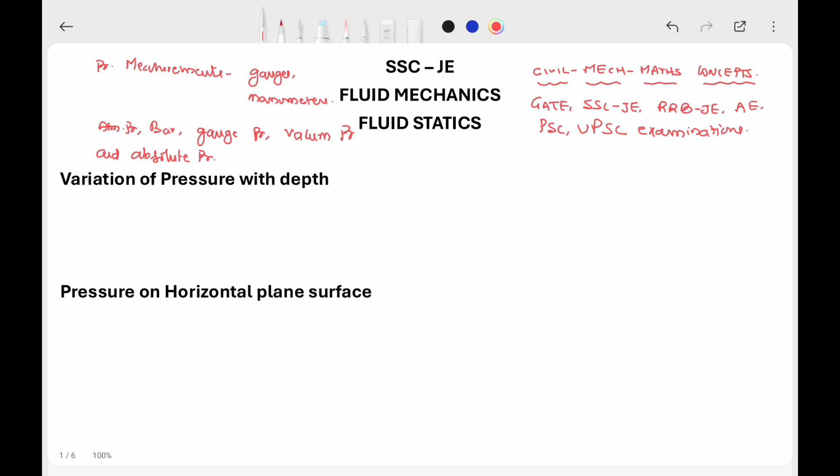As I explained in the previous lectures, a fluid can be either a gas or a liquid. Either a gas or a liquid.

In this lecture, I will be discussing fluid statics. A fluid can be static, without moving - fluid is not moving, static means not moving. And a fluid can be dynamic also - dynamic means it is moving. And there is a transient movement by the fluid. Static means there is no movement, the fluid is stationary.

Before taking up the dynamics of fluids, in this lecture and for some more subsequent lectures, I will be discussing the statics of the fluid.

The pressure definitions you already know, and the statics of fluids we will understand now. If the fluid is a liquid, then liquid statics can be called hydrostatic. And if it is a gas, it's gas statics or aerostatics. If a fluid in the form of liquid is static, not dynamic, and not moving anywhere, then it comes under the hydrostatic classification. And if it is a gas, then it comes under the aerostatic classification.

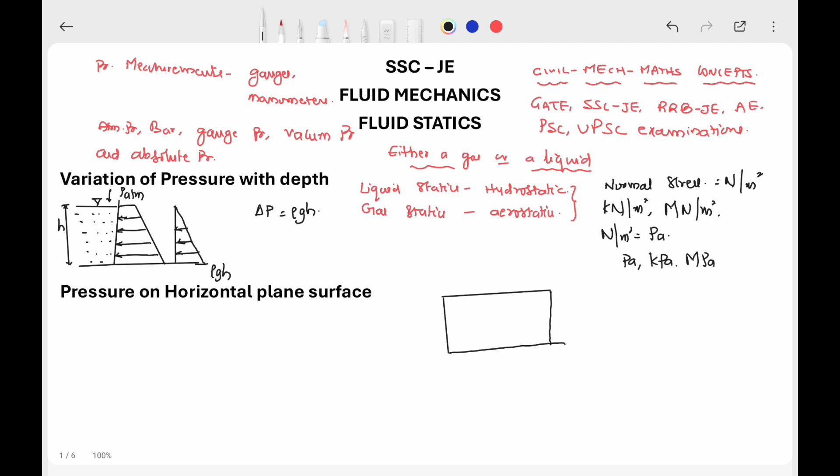Let us take hydrostatic pressure on a particular surface as the example. Let us take a plane surface. Plane surface means it has no curve - a horizontal plane surface. Undulations are not there on the surface. The surface is plane because of the absence of undulations. Let us say it is the XY plane, and this is the plate. A plate is there on the XY plane. This plate is called a horizontal plane surface.

And if I take it in three-dimensional view, it will be like this. Here fluid is there, the fluid surface. Let us draw an isometric view.

This is the plane surface. Let's say this is X, this is Y, and this is Z axis. And this is the plane - I will draw it with red so you can understand well. This is the plane surface.

For example, instead of a horizontal surface, let's say I kept the plate vertically. For example, I'll show it geometrically like this. Please try to understand, it's very, very important - these concepts, how a vertical plane looks like.

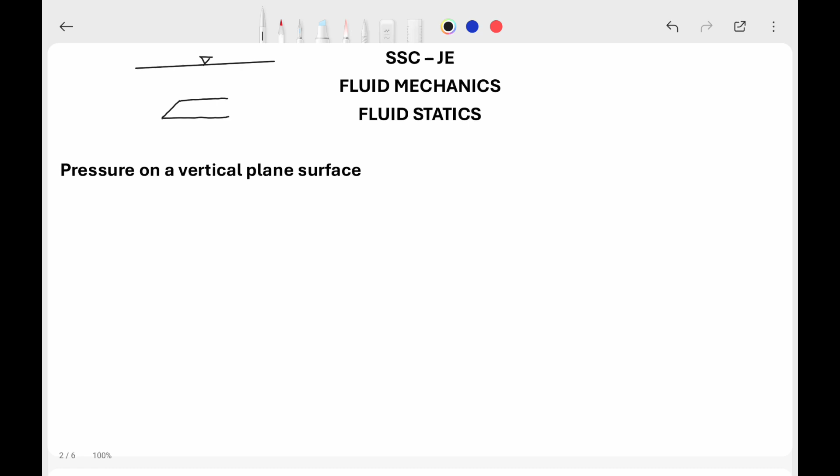The horizontal plane is the free surface, and in the z axis, a plate in isometric view like this, and this is the centroid. From the centroid it is H. Then this is the force, the normal force.

The normal force or pressure force is equal to rho g AH. This is for the horizontal case.

If I have taken a rectangular plate - don't worry, it doesn't have to be rectangular, you can take any arbitrary shape. Only for ease of understanding I have made it like this. Now, the plate is there, this is the free surface, here it is P atmosphere - this is the fluid free surface.

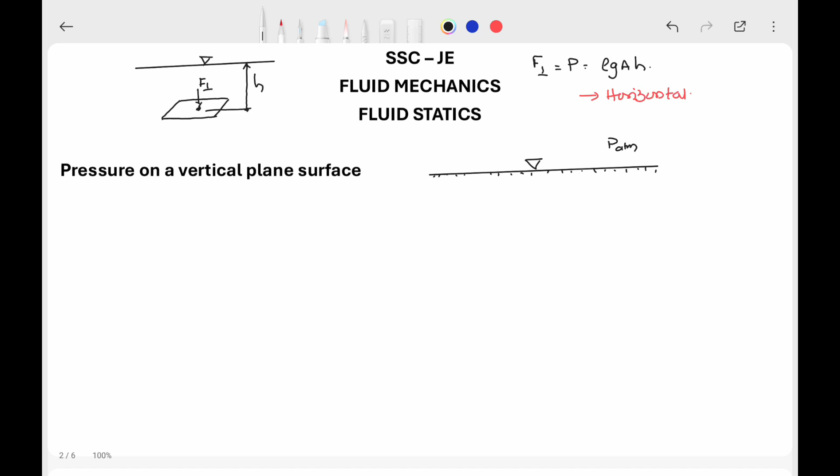Then if the plate is kept like this, it's not horizontal, it's kept vertically. When something is kept vertically, what happens? Pressure will be acting perpendicular to this surface.

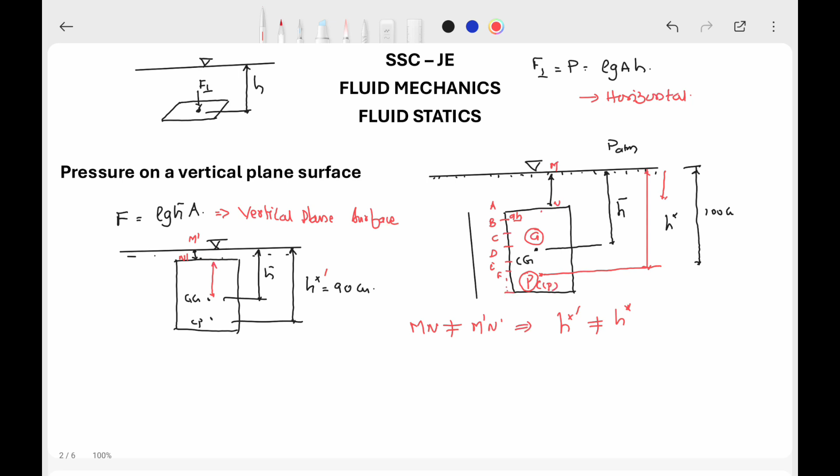This is, let us say, M, N. Here it is M dash, N dash. MN is not equal to M dash N dash, which implies H star dash is not equal to H star. Even though the center of gravity is lying at the same point for the plane surface, the heights H bar and H star dash are both different. Center of pressure differs from the height. Please try to understand this concept.

Then, how to find out the center of pressure? This is found out with the help of moments of the resultant forces to be calculated. When you calculate the moment of the resultant forces, we can get the center of pressure.

Center of pressure can be calculated, for example, about this point - I am taking a moment. That means F, about this surface, about this point the force is acting, and about this surface I am taking a moment. Please see, this is the surface, this is the force acting, and it is acting from a height of h star. What is the moment? Force into distance is moment, as I have already explained previously.

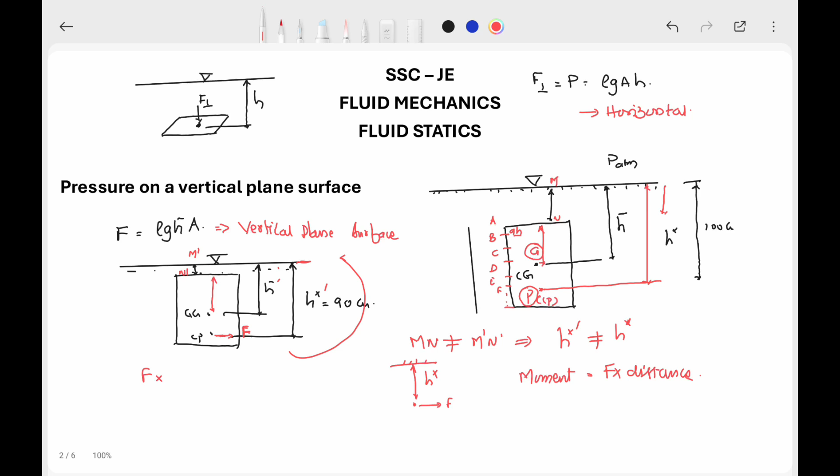Please remember this when you take the moments about the free surface. When moments are taken about the free surface, please remember this formula.

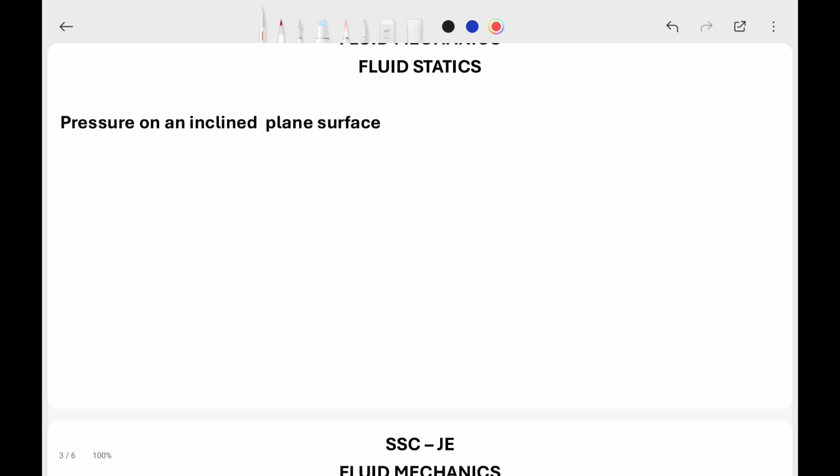There is one parallel axis theorem. What is it called? Parallel axis theorem. As per parallel axis theorem, I naught, that means moment of inertia about a particular axis is equal to moment of inertia about center of gravity plus area into height from that surface or point to the center of gravity square, h bar square. This is a very important formula, parallel axis theorem.

Why am I telling these things? Because in examinations like SSC, RRB, GATE, or UPSC, you should understand the concept behind calculation of forces on different shapes kept on different geometries, kept in different orientations. One is horizontal orientation, second is vertical orientation, there can be an inclined orientation. We will be talking about this next.

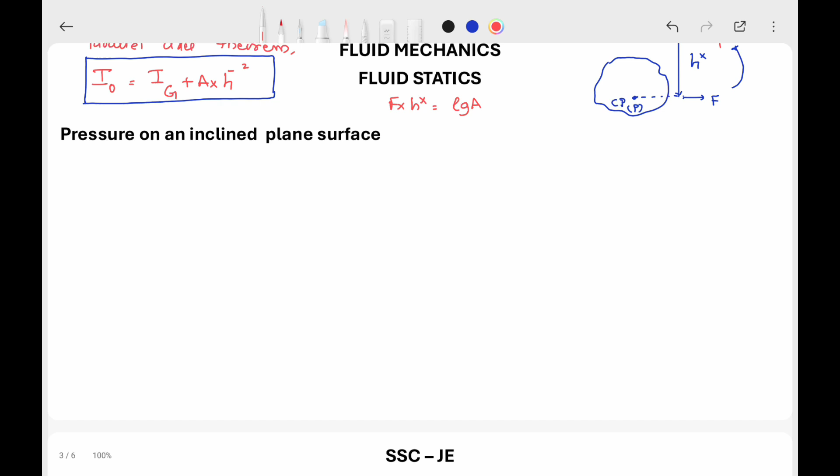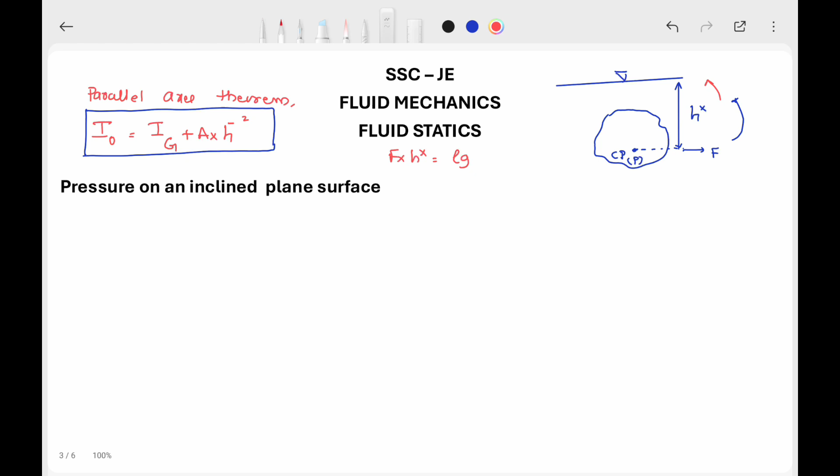When the moment is taken with respect to this, what is happening? Moment is equal to force into h star. Distance is h star. That we say is rho g A into h. This h we are not knowing whether we should take h star or h naught or h bar. For that reason, what we have done, rho g we have kept same, and we have told that we will take it as rho g I naught.

I naught is the moment of inertia of this body, moment of area, we can call it moment of inertia of this body with respect to free surface, moment of inertia I naught. What is moment of inertia? A into h square, that is rho g into I naught. Rho g into I naught, what we have done, that is with respect to free surface.

That is for the whole body under pressure. Now, I will be taking only up to center of gravity. If I take that point G, which is at a height of h bar, which we know very easily from the geometry, then with respect to h bar, the moment of inertia with respect to G is the moment of inertia of this body, and you have to add the area of this body multiplied by h bar square, so that we get it with respect to free surface. Are you able to understand?

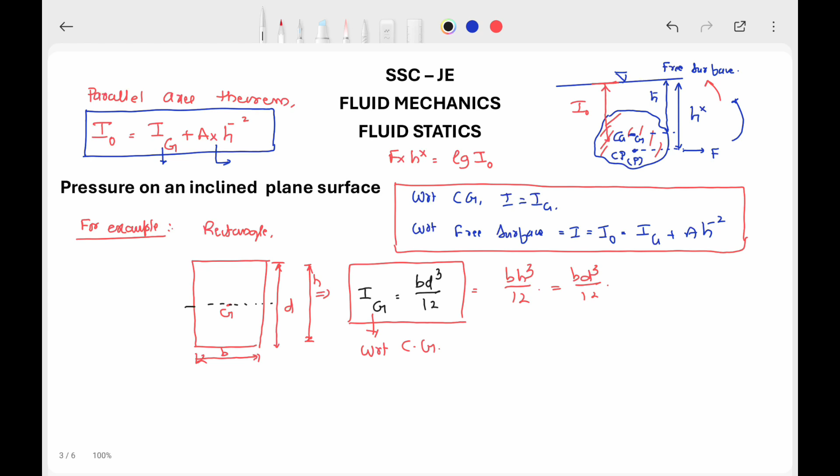Here I will say this is B, breadth or width, and this is D, depth. Breadth and depth, BD cube. Depth can also be sometimes called H, so BH cube by 12, BD cube by 12. This is standard, where Ig is with respect to center of gravity. So area is equal to BD, height of CG from base is equal to D by 2.

Now, this is about Ig. Can you find out I naught about base, so that you will understand how to calculate H. As per parallel axis theorem, what is I naught? I naught is equal to Ig plus A H bar square. What is Ig? Ig is equal to BD cube by 12, plus A is BD, into H bar is equal to height of CG.

Height of CG from the base, that is D by 2, D by 2 whole square. That is equal to BD cube by 12 plus BD cube by 4. That is equal to BD cube plus 3 BD cube, that is equal to 4 BD cube by 12, that is equal to BD cube by 3.

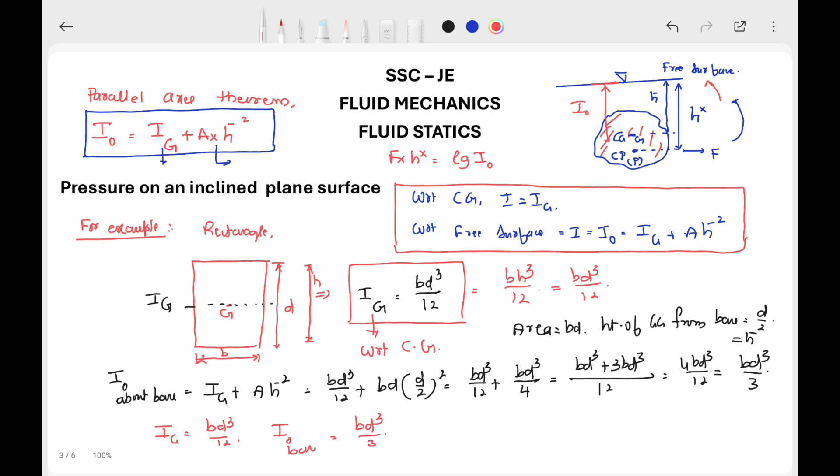Now, this is about the pressure on a vertical plane surface.

For a different case, I will give a homework. Here, let us talk about some homework. Homework is like this: find or collect values of area, moment of inertia about CG and about base, for a triangle, circle, and a trapezoid.

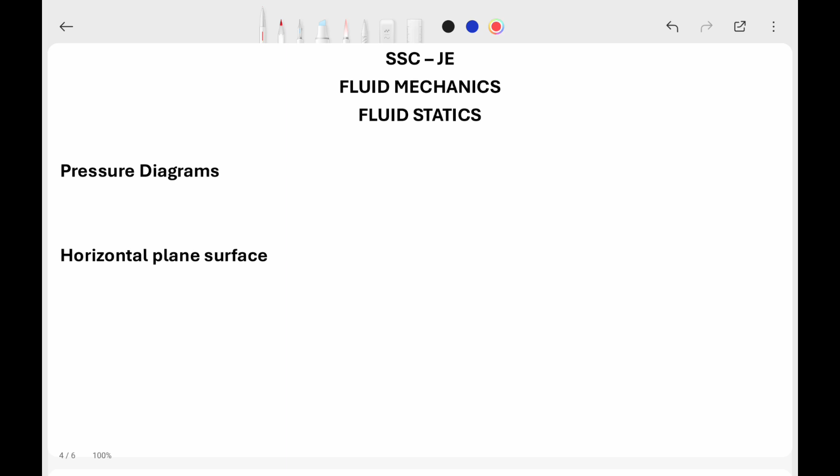Now, let us move on to the pressure on inclined plane surface. Till now, we discussed about pressure on a horizontal plane, and variation of pressure on a vertical plane surface. Now, pressure on an inclined plane surface. Inclined plane surface means how it will be? The fluid surface, free surface will be remaining the same, and the body will be like this. It's neither vertical nor horizontal, and it will make an angle theta with the surface.

Then in this case, what will be the calculations? The calculations little bit differ. They include the angle theta, and when theta is equal to 0, the surface will be equal to horizontal plane surface. If theta is equal to 90 degrees, it represents the vertical plane surface. Now, let us write the corresponding equations, and at home you please try to resolve it. Why it has come so? Please try to understand, I will give the brief of it.

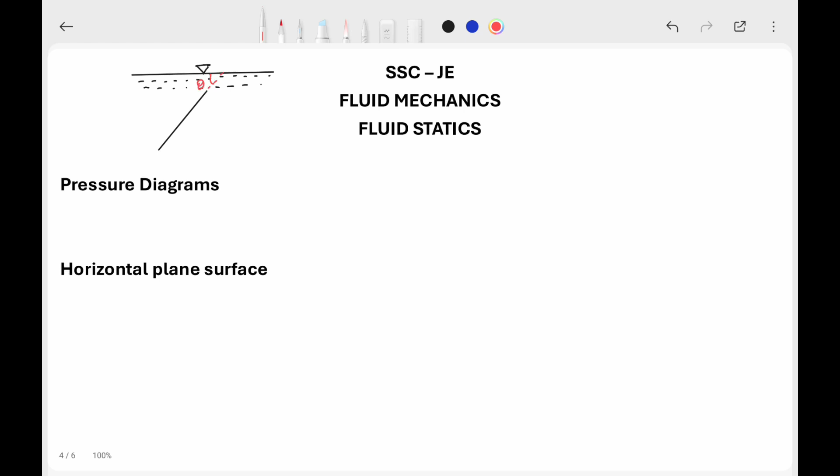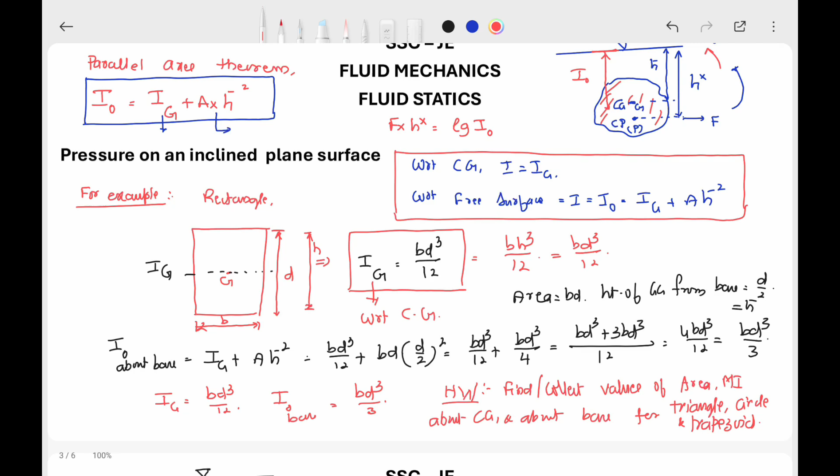Once we got the H naught, I naught is there. From I naught, we can find out H naught force, or we can find out. Now you see here we have, from parallel axis theorem, I naught is equal to Ig plus A H bar square. F H star is equal to rho G into I naught. Rho G into I naught is nothing but, let us continue, rho G into Ig plus A H bar square.

Therefore, which implies H star is equal to, what is the force? Please, from the definitions, try to understand what is the force. Force is nothing but Newton. What is Newton? Mass into distance by second square. Force is nothing but rho G A H bar. This is the equation which you should remember.

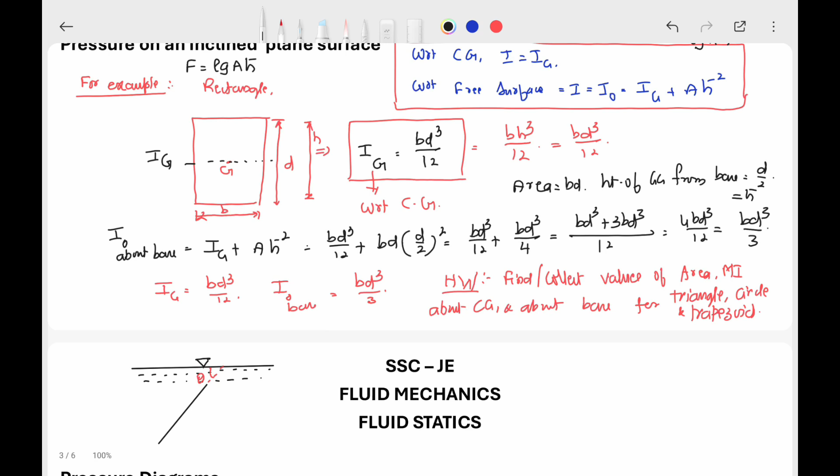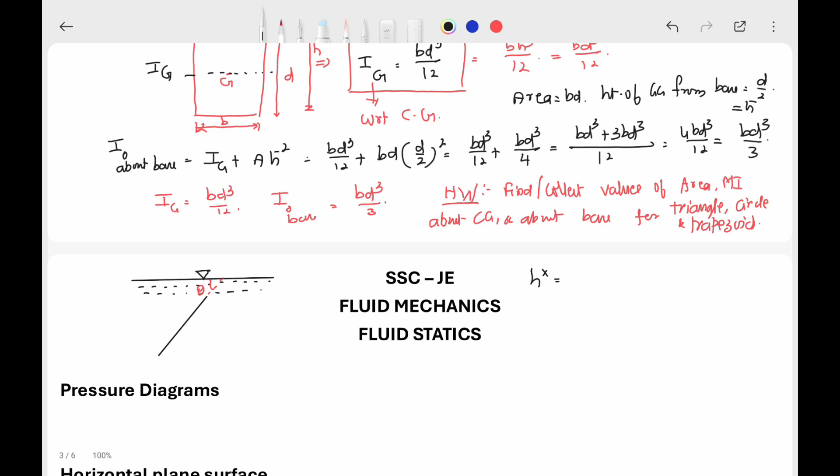We are interested in finding the center of pressure. Center of pressure is equal to rho G into Ig plus AH bar square divided by rho G into AH bar, implies H star, center of pressure height, is equal to rho G will get cancelled. This will be Ig by AH bar plus H bar. This is the formula for center of pressure. We are interested in calculating the center of pressure. Center of pressure is equal to Ig by AH bar plus H bar.

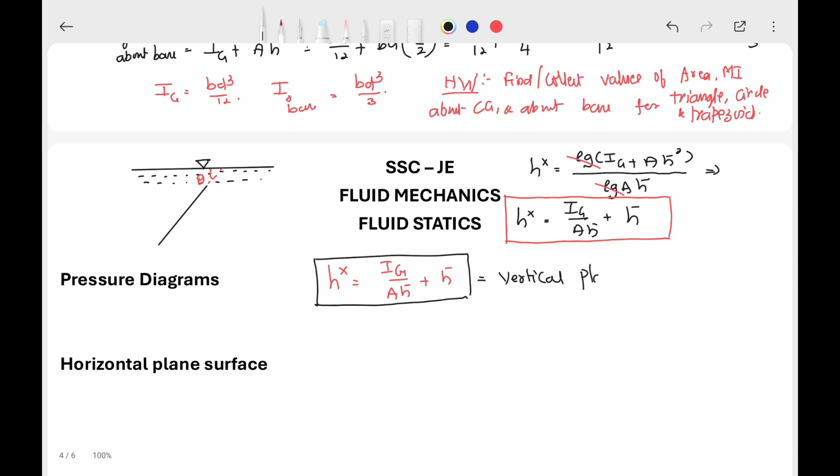Now, in case of an inclined plane, this is for vertical plane surface. In case of an inclined plane, H star is equal to Ig, center of gravity, sin square theta by AH bar plus H bar. This is the formula for center of pressure for an inclined plane.

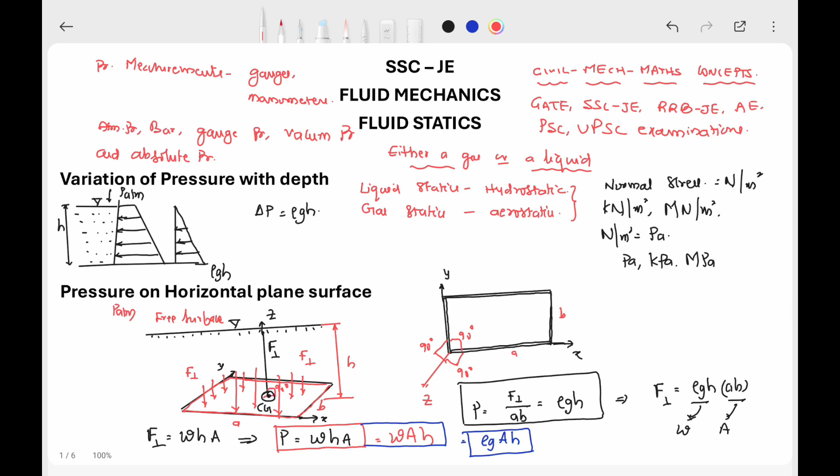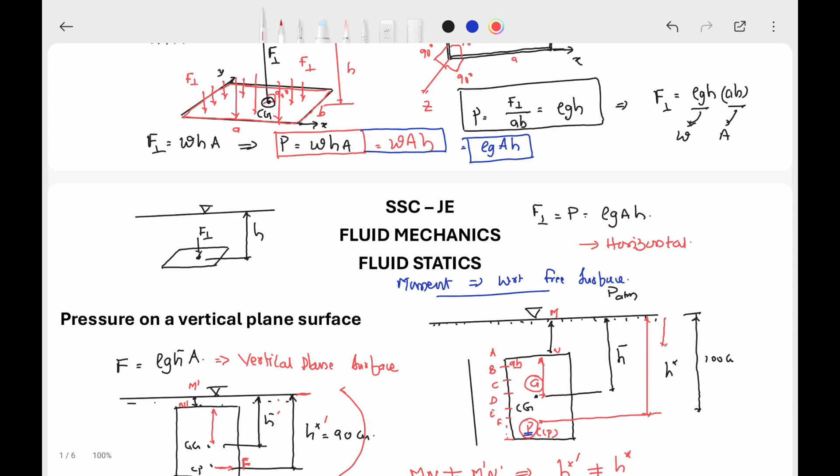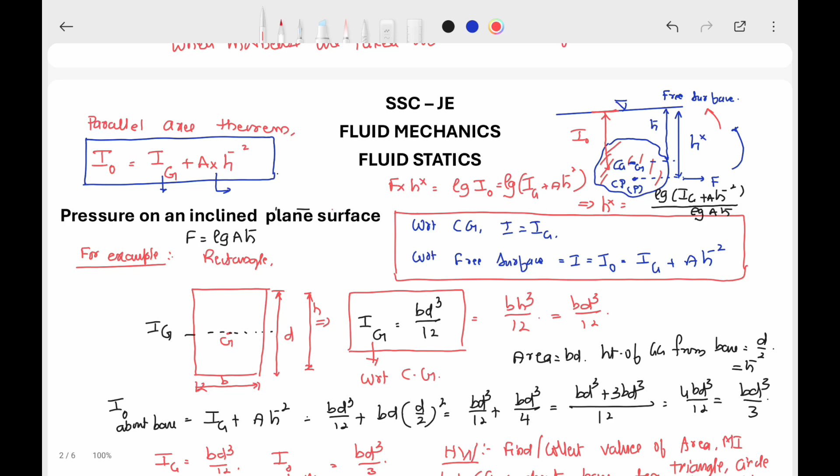Now, till now what we have done, let us see. We have found out the variation of pressure with respect to height as rho GH, normal stress, because we are now considering fluid statics, hence there is no movement of the fluid, hence shear stresses are not taken into consideration, only normal stresses are taken. Please remember this point. For a pressure on a horizontal plane, the center of gravity and center of pressure are same, the pressure P is equal to rho g ah, force is equal to rho g ah. For a pressure on a vertical plane, the center of pressure and center of gravity will be different, and using the parallel axis theorem, IO is equal to Ig plus AH bar square, we concluded that center of pressure is equal to Ig by AH bar plus H bar.

That is for a vertical plane surface. If the plane surface is inclined at an angle theta, then this comes as H star is equal to Ig sin square theta by AH bar, plus H bar. Now let us see, this is the final equation. Center of pressure is equal to Ig sin square theta divided by AH bar plus H bar.

This is the final equation. As told already, if theta is equal to 0, that implies horizontal, that implies center of pressure is equal to 0 plus H bar, that is equal to H bar. Center of pressure is equal to the height of the free surface from the center of gravity. Both are equal in case of a horizontal surface.

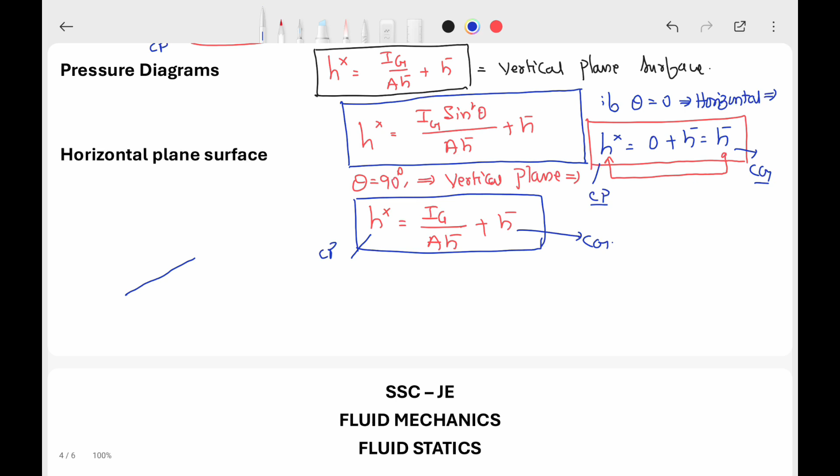Now, pressure diagrams. For a horizontal plane surface, what will be the pressure diagram? The surface will be like this. What will be the pressure diagram? I have given an isometric view. Pressure diagram will be, for a horizontal surface, the normal pressure will be like this.

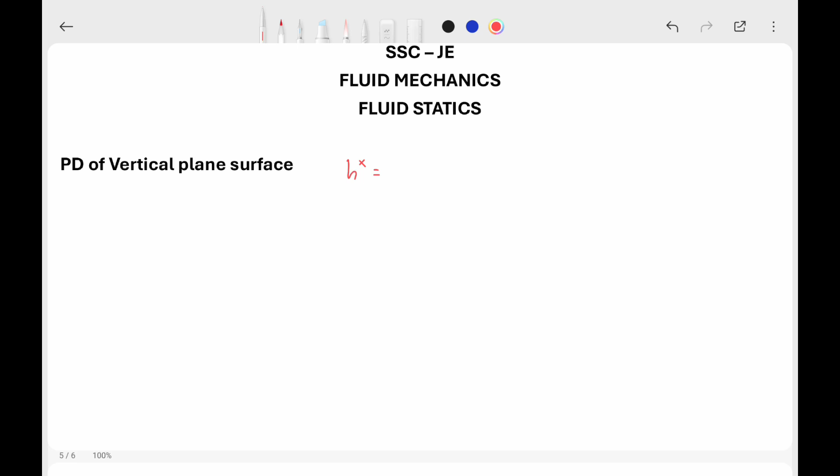Then for a vertical plane surface, what is the pressure diagram? What is the vertical plane surface equation? H star is equal to Ig by AH bar plus H bar. This is the equation for a vertical surface. Then the pressure diagram will be, please see, this is the vertical surface. Pressure varies with depth, hence center of pressure also will be different for different combinations.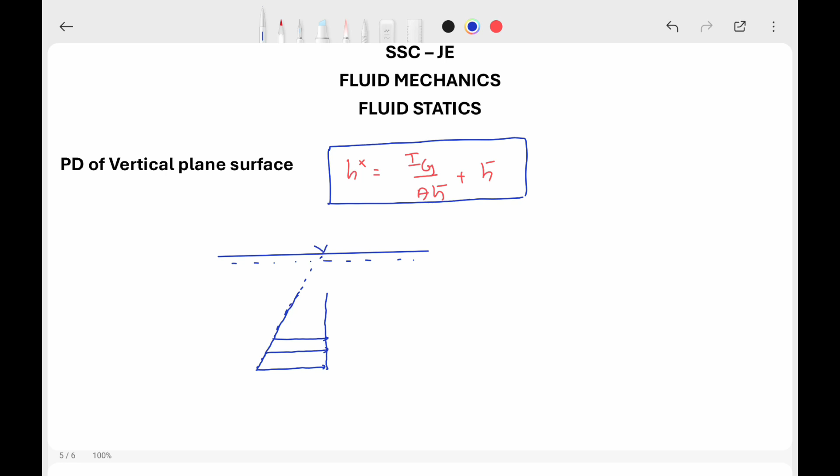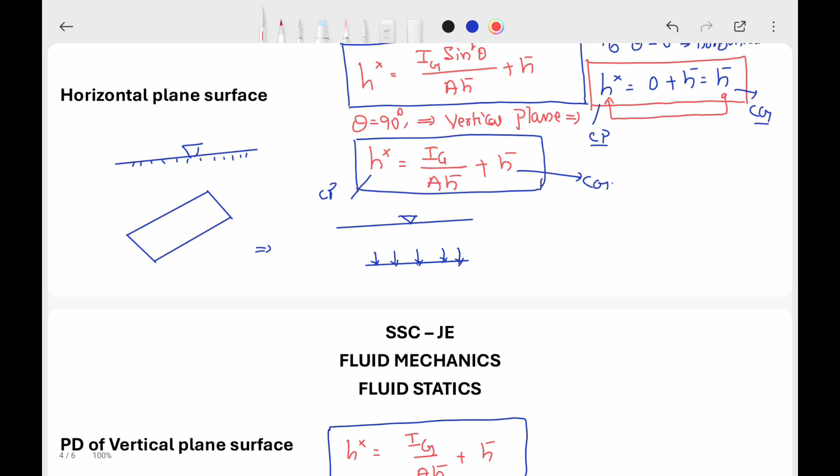The pressure diagram will be like this. This is for the vertical surface. For the horizontal surface, it is like this.

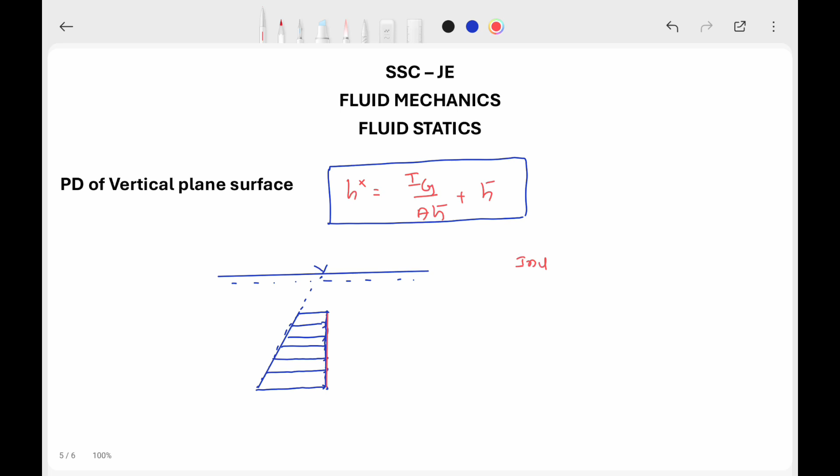For an inclined surface, what is the equation? H star is equal to Ig sin square theta divided by AH bar plus H bar. This is for the inclined surface. Now, the diagram will be

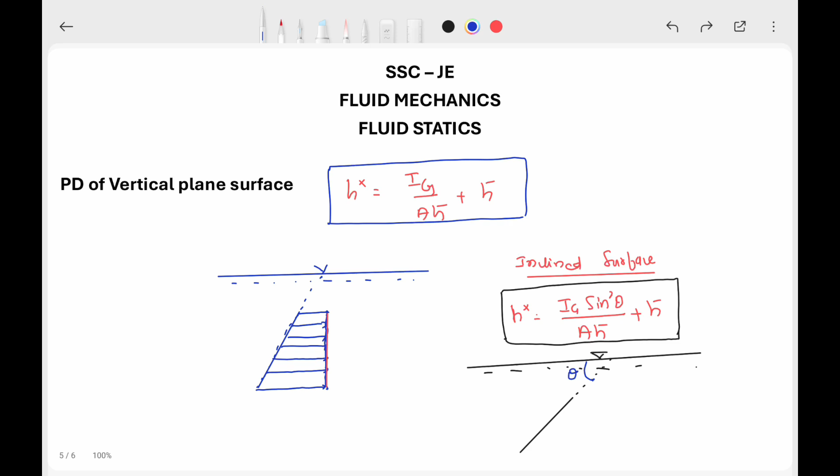this is a free surface, and the plane is like this, inclined at an angle theta, and this will be like this. We can draw it like this.

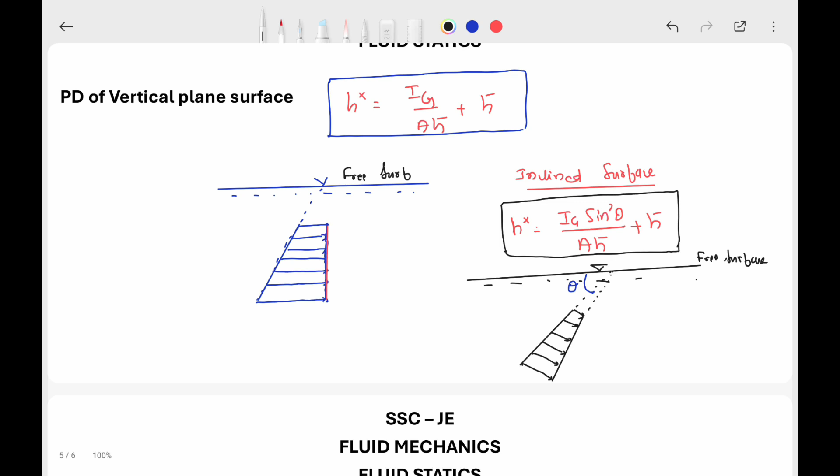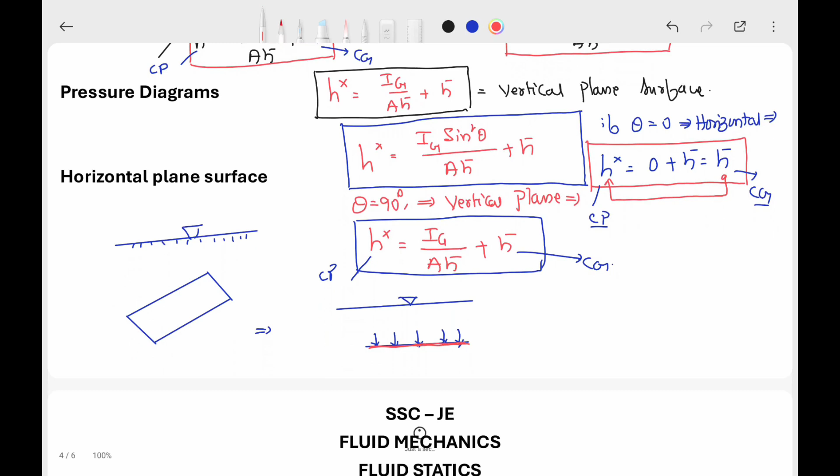And the pressure diagram will be like this for an inclined surface. Please remember, this is the free surface. Don't get confused. This is the surface, and on the surface we find what the pressure is at various levels. The last one is for the inclined surface, the second one is for the vertical surface, the first one is for the horizontal surface.

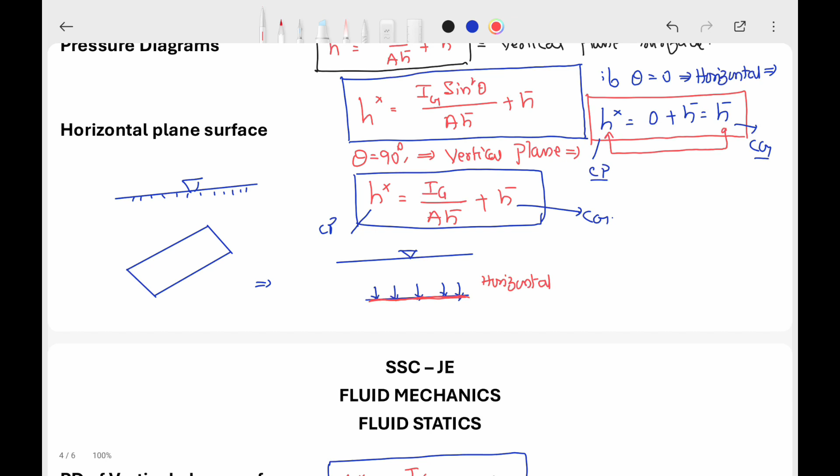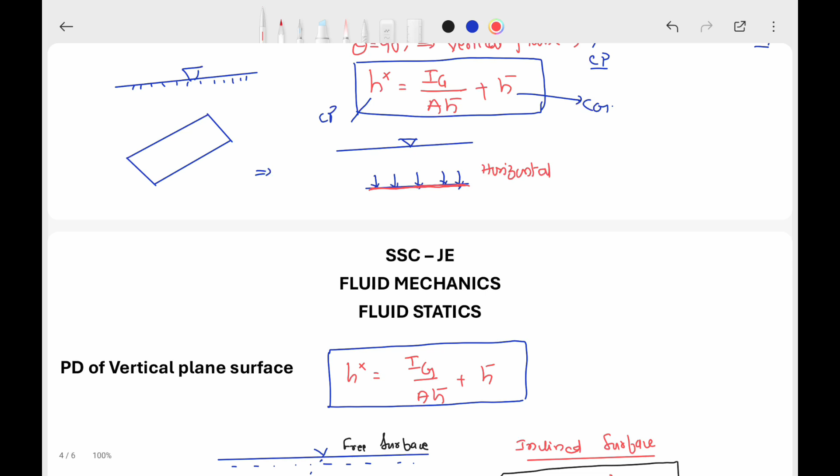Now, in a question either in GATE, UPSC or SSC JE, if a graph is given like this and you must find which is the horizontal, vertical or inclined surface, you can identify it from the diagram. Also, for theta equal to 0, it will be a horizontal plane surface, and for theta equal to 90, a vertical plane surface. For theta not equal to 0 and not equal to 90, it will be an inclined surface.

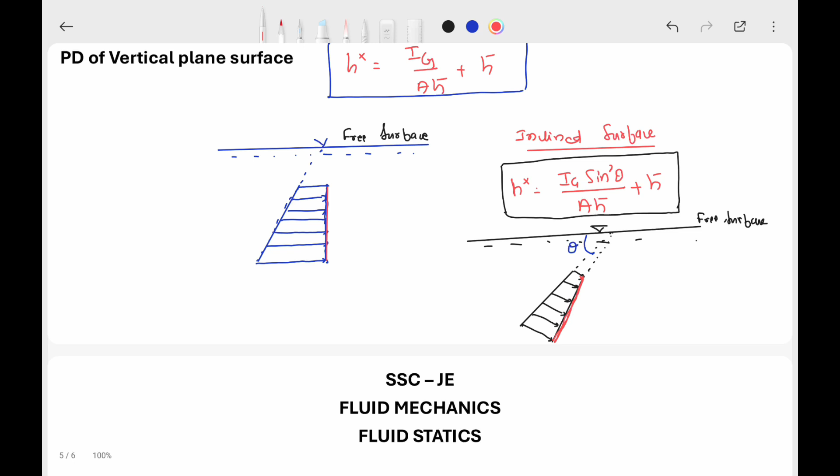And the main formula is center of pressure H star is equal to Ig sin square theta by AH bar plus H bar, where H bar is the height of the free surface from the center of gravity of the plane, and the center of gravity of any plane is constant based on the geometry.

For a rectangular plate, the moment of inertia with respect to the center of gravity is BD cube by 12, and with respect to the base, it is BD cube by 3. For a triangle, circle, and trapezoid, please find it as homework. Already I have told you, add circle also. For circle, find the moment of inertia.

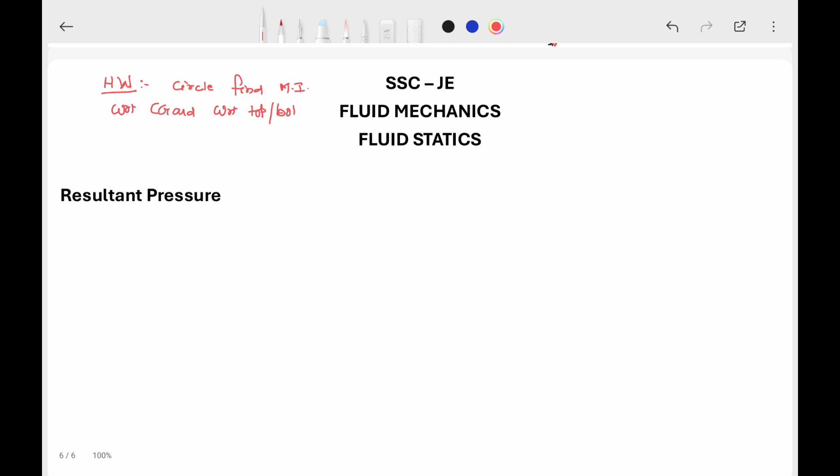With respect to center of gravity, and with respect to, we can say, bottom or top, or bottom circumference, point or plane.

Now, here H bar is equal to total pressure point. H star is equal to center of pressure. Please remember: total pressure point position with respect to free surface, center of pressure position with respect to free surface. Please remember these two things. Don't get confused.

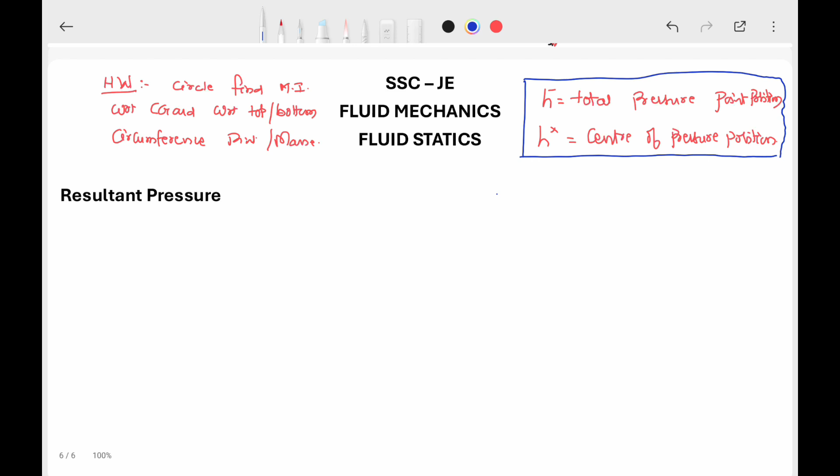Just for your final understanding, I will make like this. I will make a free water or fluid surface. I will take an inclined plane, because inclined plane means it's applicable for everything, and let us say it is center of gravity. This is the H bar.

Let us say this is center of pressure, this is H star. H bar is total pressure point position from free surface, H bar. H star is equal to center of pressure position. This is center of pressure. This is center of gravity. This is total pressure point. This is center of pressure point.

Now we have understood, and another is curved surface. There can be a curved surface also. There can be a curved surface like this. A surface can be curved. The surface of the plane can be curved.

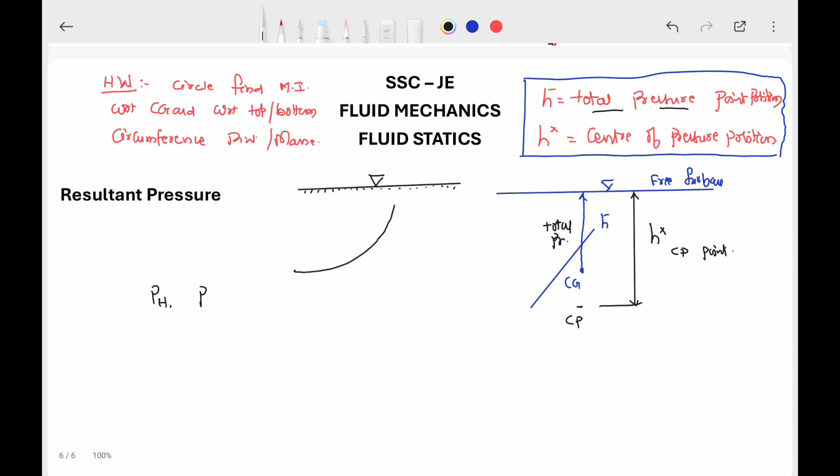This is the free water surface, and if there is a curved surface like this, there will be center of pressure. There will be two components, horizontal and vertical, for the total pressure. For the total pressure, there will be horizontal component and vertical component, which implies the resultant total pressure is equal to square root of PH square plus PV square. It's not plane, curved. PV is vertical, PH is horizontal. Resultant pressure is equal to square root of PH square plus PV square.

And angle of action of the resultant pressure is equal to theta, direction of the resultant pressure is equal to tan inverse PV by PH.

In competitive examinations, there can be a question on curved surface and resultant pressures, like they may give you theta and horizontal component and ask you to calculate the vertical component, or they may give the horizontal and vertical components and ask you to find out the direction, or they may give theta and horizontal component and ask you to find out the resultant. Once theta and horizontal component is given, you can find out the vertical component with the formula theta is equal to tan inverse PV by PH, or tan theta is equal to PV by PH. From this, you can find out the missing PV or PH, and we can put the values in this resultant square root of PH square plus PV square and find out the resultant force.

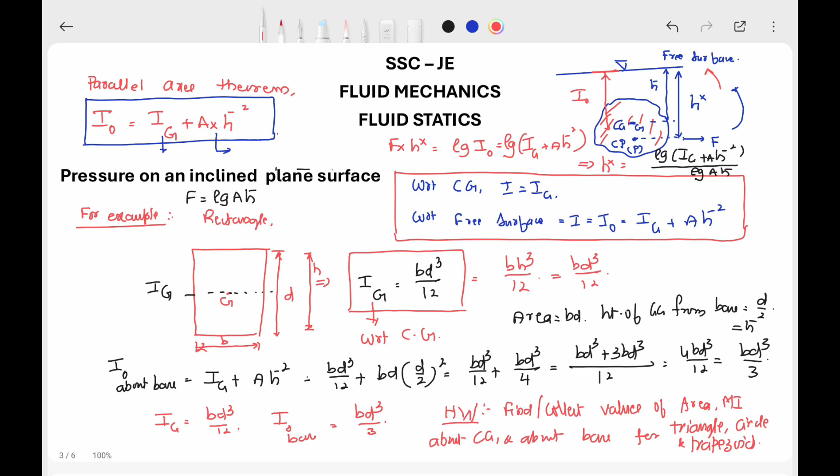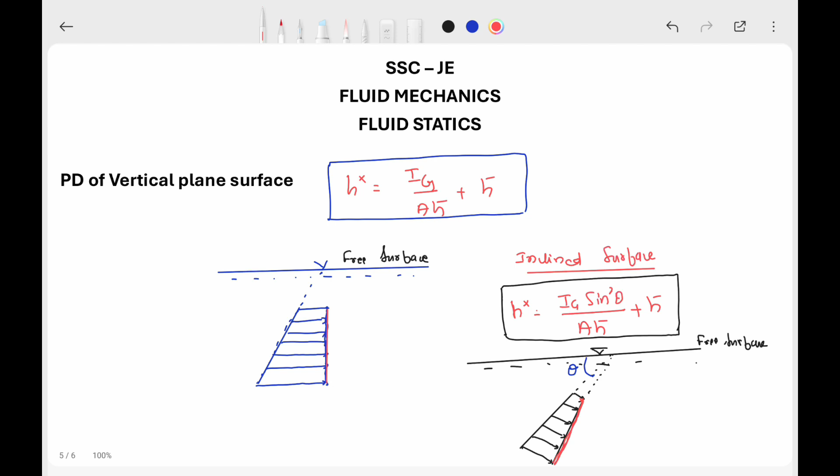And this is what about fluid statics, which is a very important, little bit definitely a topic which requires your hard work and practice and exercises, so that your concepts can be concretized, so that you can use them without any difficulty in the examination. These concepts are very important. Even in soil mechanics, these are useful. Even in the designing of the dams, these concepts are useful. The pressure concepts, soil mechanics, and also in irrigation engineering also, these are important. Please try to understand these basics well, so that you can do better in the examinations.